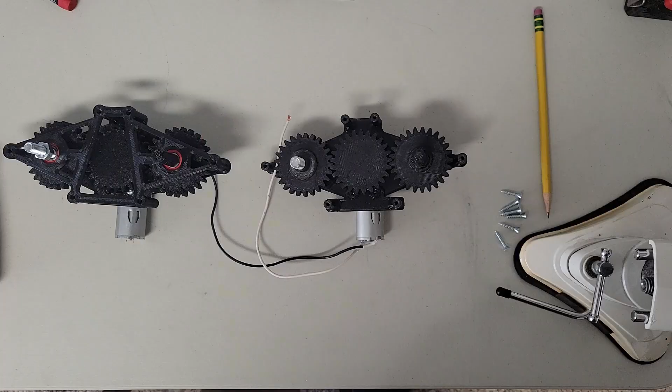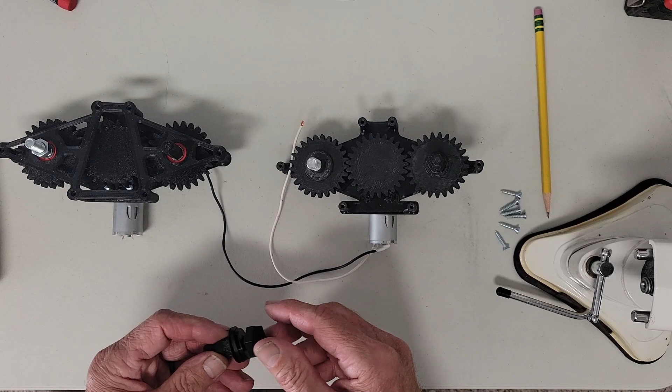A little history. On my 2.0 version, I had a complete plastic axle, plastic nut, plastic washers that held the drum on. So unless you were careful, and I have a video covering this, sometimes these parts melt if there was too much heat transfer into the drum.

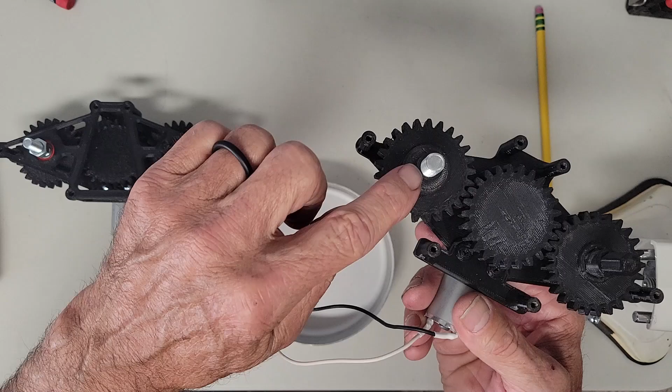Well, I tried to solve that problem with my 2.2 version, which takes an actual nut and washer, but the thing is, it was still necessary to have contact as a stop against this plastic. So even though we had a metal nut and a metal washer here, which helped soak up the heat, there were some instances where people still ended up melting this, and so I wanted to come up with a solution

for that. So this is the old gearbox, which is 2 bearings, one bearing on each side, and being 1 bearing, obviously 2 bearings give you more stability, so I was actually relying on part of the box up here for support, which is not optimal.

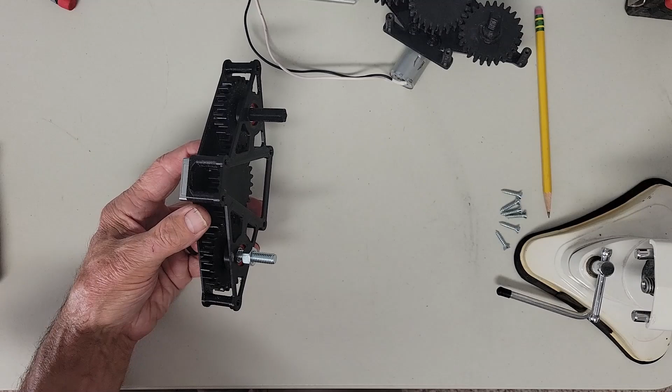Well, what I've done is I've come up with version 3.0. This one is a 4 bearing design, or 2 on each axle, much sturdier. I've completely eliminated the plastic contact with the drum, because now here we got a stopper nut that is actually able to adjust with the drum, and this isn't the correct drum for it, but anyway, the drum will go over with another nut and a washer, so there's no plastic in contact with this.

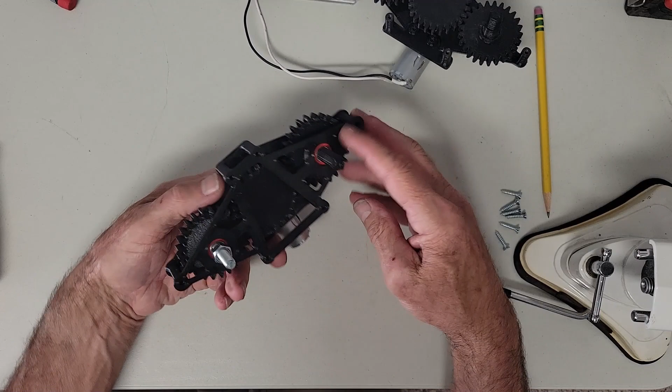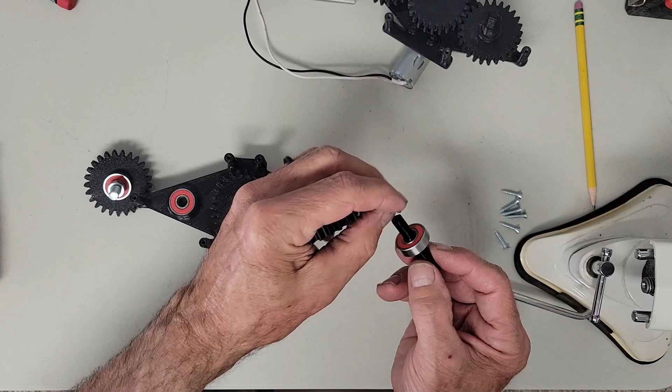I'll show you. And also for added stability, of course, I've got this bearing brace up front. So let me just cover how this is. So we've got our 2 bottom bearings, and on the cartridge drum side, this is an axle, but it obviously does not spin on it because we got the inner bearing race, and of course then we got the bearing on top, so it's completely sandwiched between 2 bearings with a bearing spacer there.

And this side, again, this goes in the bearing bushing, but on this side I've created a hex hole so that the 1.5 inch by 5/16 inch bolt sits in there and then gets sandwiched between the 2 bearings. So there's no plastic touching throughout the drum until you get to the head of the bolt, but there's a lot there to soak up heat, and a big surface of plastic I don't think will ever be a problem. It wasn't a big problem the other way, but this way it should definitely not be.

And then of course we've got our bearing brace that goes on top of all of that, and nice sturdy unit. Can't turn it because the motor's on there right now, but everything turns smooth, and I'm really happy with this setup. Now I'll show you how to install the gearbox. First we start with the motor.

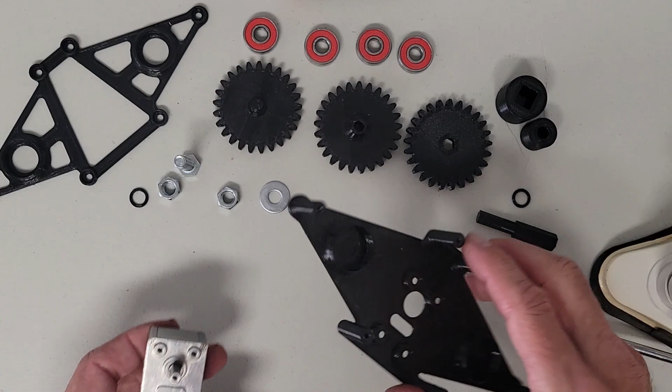The 2 close uprights are the top, the far ones are the bottom, and the motor points to the bottom. So you'll place the motor on there. You need 4 3mm by 6mm screws, and those items are in the list. Unfortunately, the motor does not come with them.

Okay, next thing we'll do is take the center gear. It is the one that has a flat spot in the hole, and you need to line it up with that flat spot on the shaft. So I usually just turn it on there and gently give it a turn until it slides down, and then just push it down until it stops.

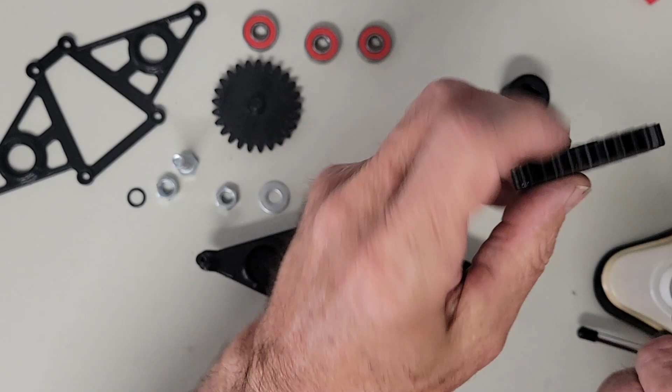Next, on the right side is the cartridge drum, axle, and gear. So we'll take the cartridge drum axle, slide a bearing over it, and then a bearing spacer, and then take the gear with the elevated side down, because that's the other side. The bearing spacer is already molded in, printed into it. Put those together, so now you should have a gap, the bearing spacer on each side.

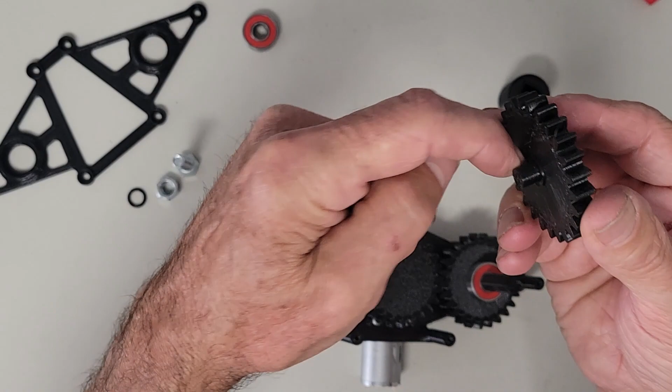Place a bearing into the hole and place it on the shaft. Now for the left side, for the drum gear, again, place a bearing in there. Here is the drum gear with the bearing spacer, again, already printed onto it. So the large hex hole will be up.

Next comes the drum axle, which is a 5/16 by 1.5 inch bolt. You will put a bearing spacer over the bolt, followed by the 4th bearing, and then just insert it into the hex of the gear.

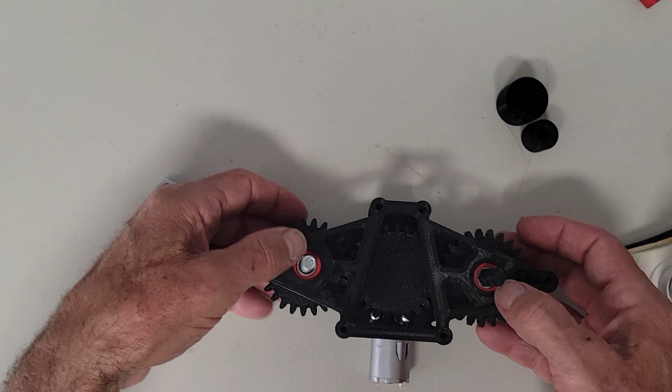Now we have the bearing brace. Just put it over the top, and with your fingers you just need to pinch on each of the posts and the bearing to make sure they're all seated. I go around a couple times. You should hear nothing go down anymore. And your gearbox is complete.

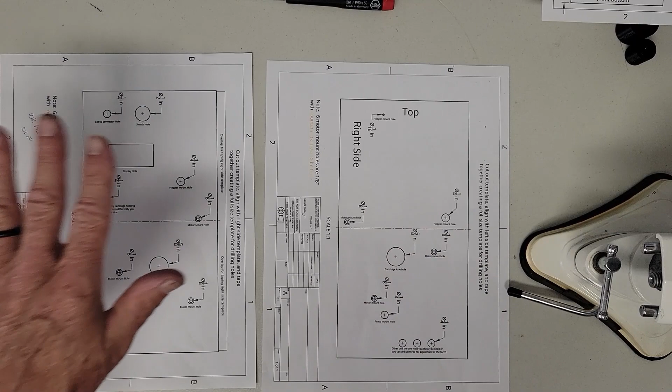Now, in your instructions you will have 2 template pieces. Like this, how they go. This is the left side, this is the right side. I wanted it to fit on an 8.5 by 11 piece of paper, so making it full size of both sides, it'd take a large piece of paper.

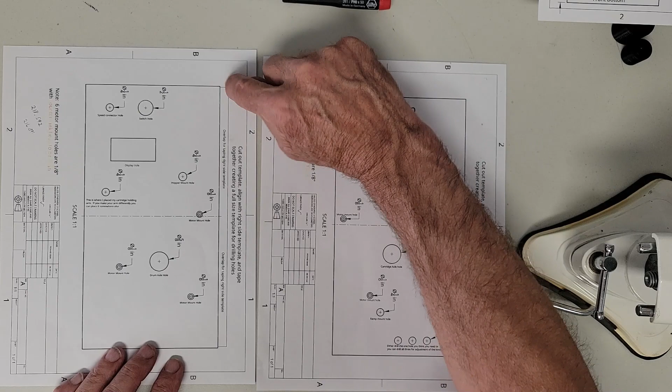So what you do, you follow the instructions on here and you cut out these 2 squares, which is the template, and the instructions on here explain that. Remember, on the left side here, you need to leave this extra box I have, because that is where you're going to overlap this side, and it just gives you some purchase to tape to. So on this one it says overlap for taping right side template. So you actually want to cut out here and follow the outside line.

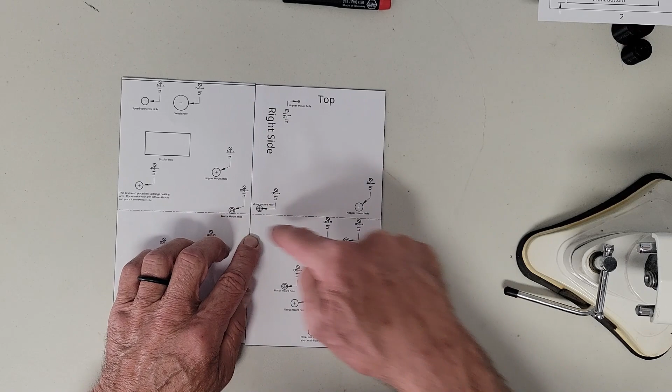So when you get those 2 cut, this is what you will have. Now what you'll do is you'll take the right side and place it over the left side and line up. What I generally do is I move it inward like this so that I've only got one visible black line. Then you should have one black line there and one there. Disregard this one on there, this one's just a demo piece. But this should be a straight line also. So this dotted center line should line up.

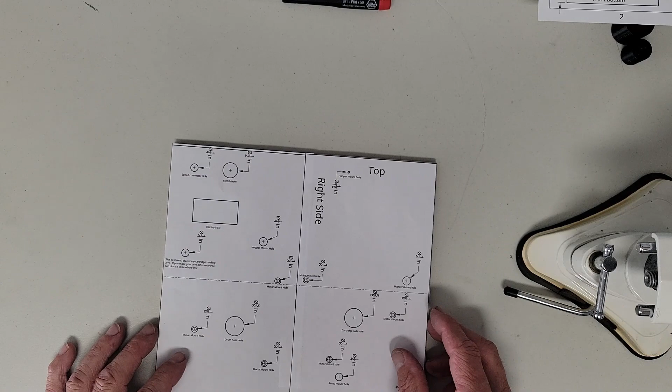And then when you've got that, you get a piece of tape. You're going to tape them together. And then you'll get your front face piece of wood and you will line them up on here. The sides should be the exact size piece of wood. Get you some tape. Tape it around on each side.

And then what you will do is you'll take something sharp. I have a center punch, but you can use a nail and place it carefully on the center of each of those little X's on all of these holes, and just give a light tap to put an indent for your bit to start.

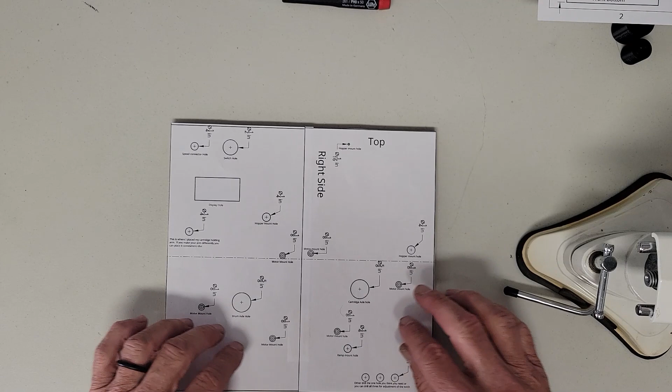And I've marked on here what size hole this has to be. This looks like a double hole, but it's an 1/8 inch hole, and the outside hole is showing the taper, because these motor mount holes need to have a taper so your tapered screw will fit flush, so nothing will touch it from the other side.

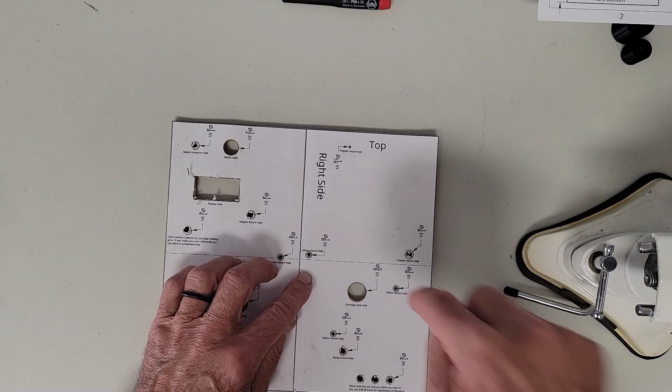And so here's an example. This is mine. As you see, you just take and you drill right through the paper and follow those instructions, and when you're done, you should have something looking like this, except for the mistake I made, which is a hole right there. I was prototyping, and this was the hole for this old hopper.

But as I found out later, when I went to put the electronics on there, the electronics hit that. So I had to redesign the hopper like this. And so now that gives me room on the back that's away from the electronics. So that has been fixed. But this is what you should come out with. Tapered holes, 5/8 inch holes here. And yeah, just follow the instructions and you shouldn't have any problem.

When I'm putting the box together, I generally glue the pieces and I put these tiny finishing nails. It's up to you how you want to make your box. In fact, your box does not have to be this size. I could take a piece of wood that's thicker or thinner or even larger size, as long as you place your template on there the way you want it to be.

Picture this being a bigger piece of wood. If I wanted it right there, as long as you put your holes there, everything will fit where you want it. So you're not limited to the box that I have. It's just my recommendation. I like a small footprint.

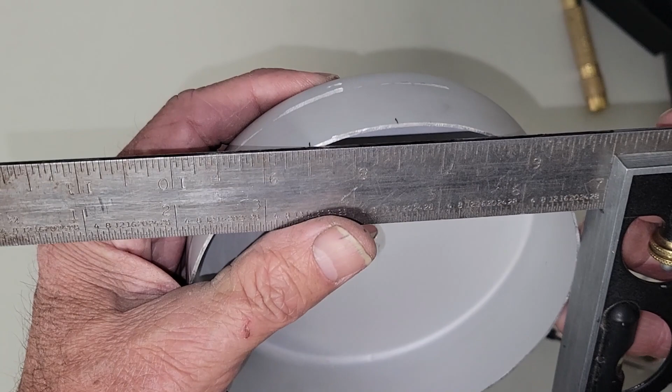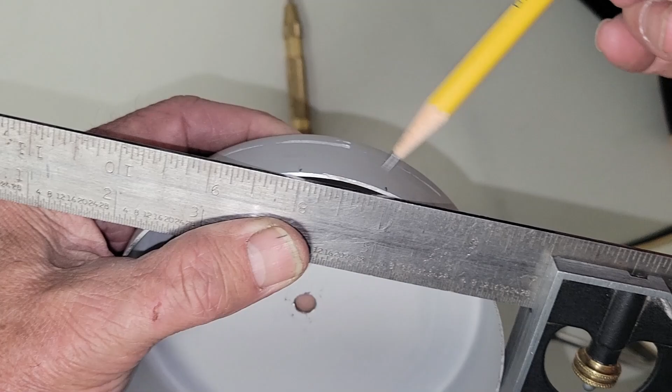Now the next thing we've got to do is cut our 1 inch slot for the cartridges to drop in. So what I do is, I've already marked mine, but essentially any ruler, just put it on there, and of course I just marked straight across. It doesn't have to be at the radius, but 1 inch, a 1 inch mark.

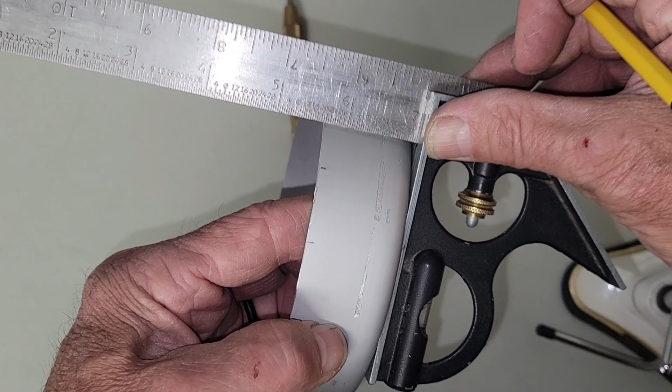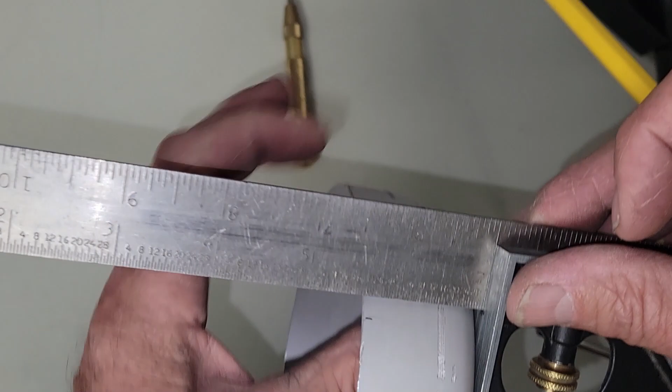And then what I do is I take my square and hold it against the base. I would suggest not to do this, because if your cut is not perfectly square, then your lines will probably be crooked. See if I can do this holding it. Just going to draw 2 square lines all the way down.

Okay, again, I'll go back out to my Dremel, and a hacksaw does work pretty good on this, but I'm going to cut all the way down to the base. And you see we've got this radiused lip. When this cutout is gone, that lip needs to be totally gone. So in other words, the outside edge of this will be exactly flat with this going out, because if it's not, then the base of a cartridge could catch on it and flip it crooked. So I'll go take care of that.

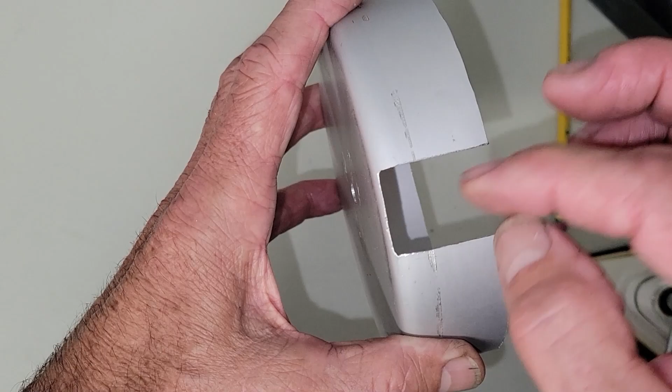Okay, the cake pan is done. There's my 1-inch notch. A couple tips. So I just did the 2 cuts like this, and you don't have to worry about cutting along here, because once you've got those 2 cuts, if you just take this piece in your fingers and work it back and forth about 5-6 times, it'll just break off, and then you just have to clean up this edge. As you see, I have this edge that's perfect with the bottom.

Another tip, I put a piece of duct tape, but just put some tape in here, because you're going to have to take your file and file this smooth, and it just prevents this from getting all scratched up, which I've done on an old one, but it's just cosmetic. But there we are. We're all done with the pan. Now I'm going to mount it. Now let's go ahead and assemble the annealer to the face.

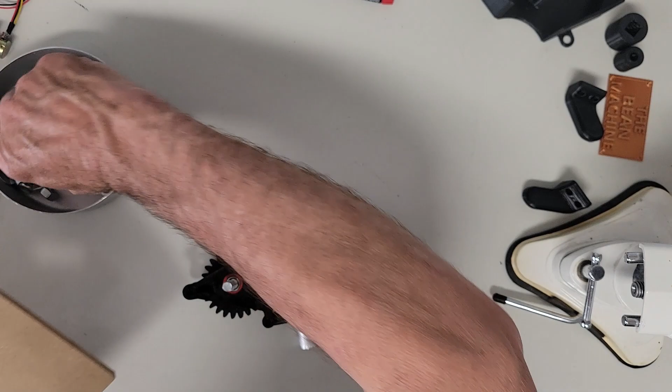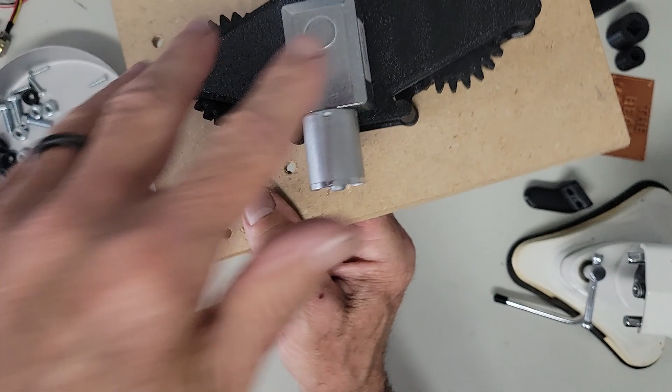So what I do is I just take the gearbox and lay it down, and I start the 2 outside screws, tapered screws. And I run them down until they just barely stick out. And that allows me to take the gearbox, and I can already set them on those holes and get it going. See, so it's already in place. Turn it over, set it down, tighten these 2 screws.

Now when you tighten these down, you just want to make them tight enough that you have no more gap back there. So I have a slight gap, I can still see. You don't need to really cinch them down and strip anything out. There just needs to be all the gap taken up.

Okay, next we'll take the hopper. The hopper is held on by 2 1/4-inch bolts and 1 machine screw, and you don't need washers. It's up to you if you want to put washers on the back, but I don't use them. So this screw here is similar to the tapered ones, and you can use a tapered one if you happen to get a pack of 12 or whatever, but I've just got a small head screw so it doesn't really interfere with the cartridges laying in here.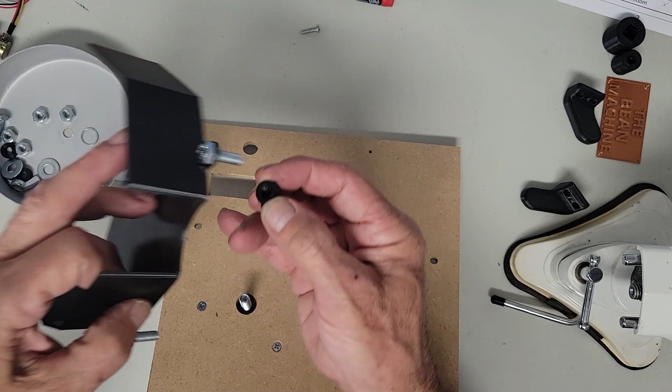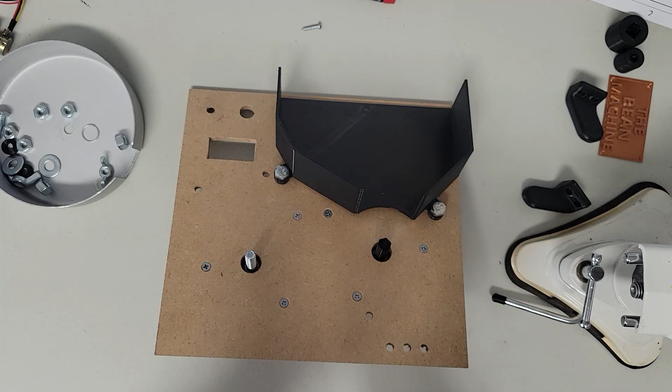Then, oops, let me back up. Missed an important thing. 2 hopper spacers, or actually 3 with the screw up there, but you've got to have the hopper spacers. So it should look like that with a gap behind, because it's necessary to bring these parts on this side a little further out than the drum so it doesn't accidentally hit the lip of the drum when the cartridges are going in.

And these can just be finger tight. I've never tightened these with a wrench. The only 2 I tighten with the wrench are the arm and the ramp. Okay, one more item. I put this spacer up here, then I just squeeze to kind of keep it from falling down in, line up the hole and put the screw in.

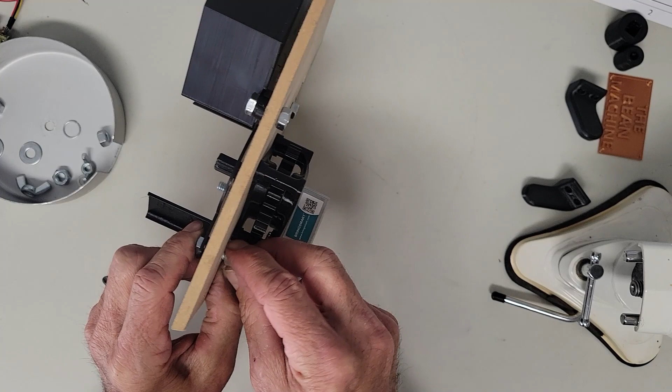Okay, next is the ramp. The ramp also has a spacer in the back with a 1/4 inch by 3/4 inch bolt. And that goes on the back, and when everything gets together, we'll just adjust this where it needs to be. But it is adjustable both in how far away from the drum and also the angle of the ramp that you might want it to be. But right now we'll just set it here. Okay, and once you've got that motor on the back, it will just stand like this.

So next thing we'll do is take the drum. Take one of the 5/16 inch bolts, screw it on down. Now, this will fit in the hole. This is what makes the adjustability. On my old version 2, my printed plastic piece kept the drum a certain distance away.

I suggest 1/16 to 1/8 of an inch away from the face to start off with, but this is adjustable. You'll be able to adjust the drum in and out because this will now go on here with a flat washer, which I provide, and another nut.

And then, so now there's the adjustable gap in the back. Okay, and as far as, if I can find my piece, so this is what you also get from me. This is one of the key features of this, because it's adjustable for your cartridge size, however you would like it. This one here is primarily for 223 size cartridges. This is for 308 and 30-06 size cartridges. And this is for larger, I forget, like 300 Winchester Magnum and so forth.

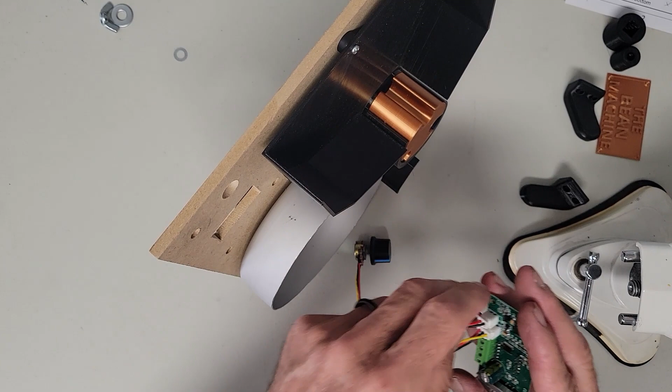Okay, now the electronics. You will get this, I think I already threw it away, but this comes in a black housing with a red cover. All you do is get a screwdriver and pop this out of that cover. So this is all you want. The cover is garbage. It's way too big for this. It would take up this whole spot here. But go ahead and unplug the switch and the rheostat, and they can only go in one spot, so you don't have to keep track.

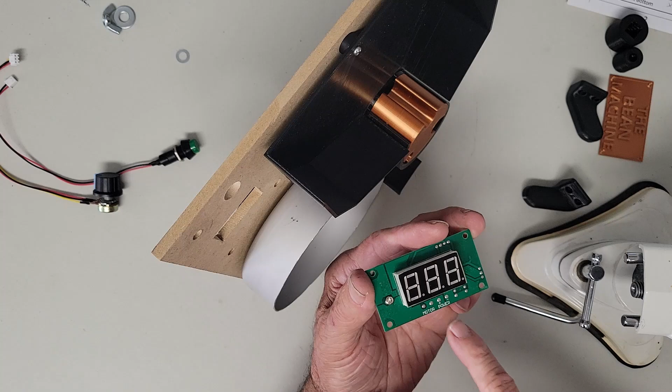On the front here, it says motor and power right here. Power positive. Once you put this on, you won't be able to read it. So I just took that positive sign and I wrote it there so I know which is the positive power for this. You then just, if you cut your hole a little small, you might need to file it, but when it goes in, it should fit perfect like that.

Another side note, on here, I've already clipped them off, but there are leads where they soldered them on. I just took my clippers and I clipped all those off, because if you don't, it'll hit and it'll sit crooked. So I think there were 6 of them there and 4 of them there, but once you've got that all smooth, this will fit in there real nice.

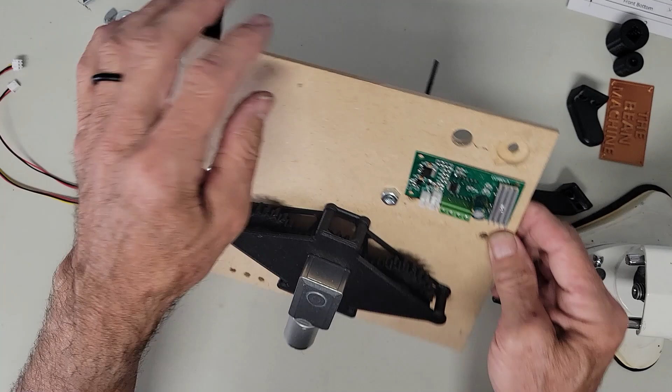Now what you can do is, I'll leave it up to you. You can either take 2 small screws and put them in opposing corners, or you can just take hot glue and put some hot glue on there and keep it in. Next, you'll take your on-off switch and take off the nut. Now, it does come with this lock washer. Go ahead and leave it off, because as you'll see when I get this on there, there's just enough threads for the nut. So feed it in to the hole on the right.

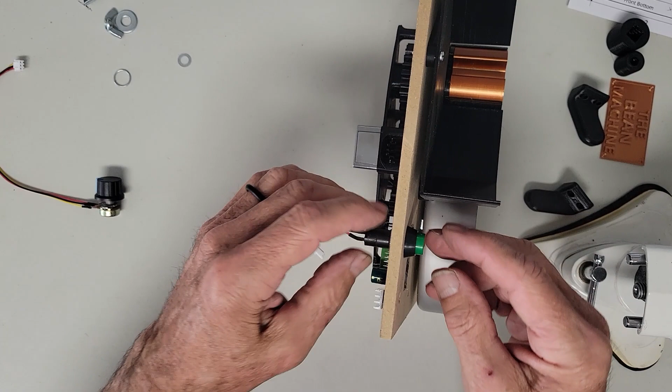Put your nut over the wire. And again, you can just do this with your fingers. You can just hand tighten it. So that switch is in there. Now you take the rheostat, you pull off the knob. Again, it comes with a washer. I don't use a washer because you're going to have very limited threads. Take the nut off. Now I'll show you what I had to do here.

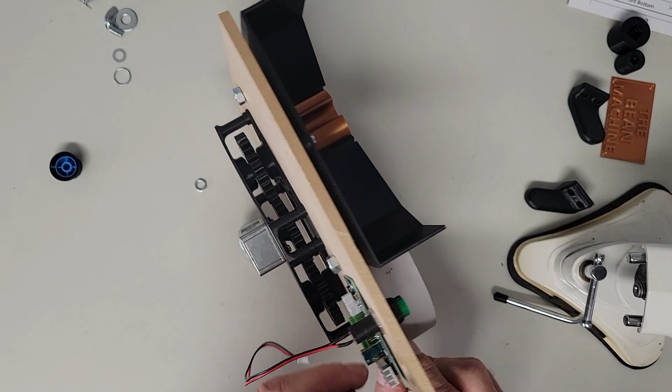If you put this through here normal, like if you stop right there, you'll have to do a couple things. One, you won't have enough threads to put the nut on. But if you elected just to slide that on there, it would still function, but it's barely on. So you'd either have to trim off the edge of this knob to slide on further, or what I did

is I took a 3/4 Forstner bit, and this wood is very easy to work with, but I countersunk it halfway, and then I needed to make room for the 3 wires coming out, so I just took my knife and I just whittled it right there so that it fits right in there like that. And then now, as you see, I have enough threads for the nut.

And the knob. Okay, of course I didn't glue this in, so it fell out, but once you get it mounted, obviously it'll stay there. Okay, then just take the 2 cables and connect them back on there.

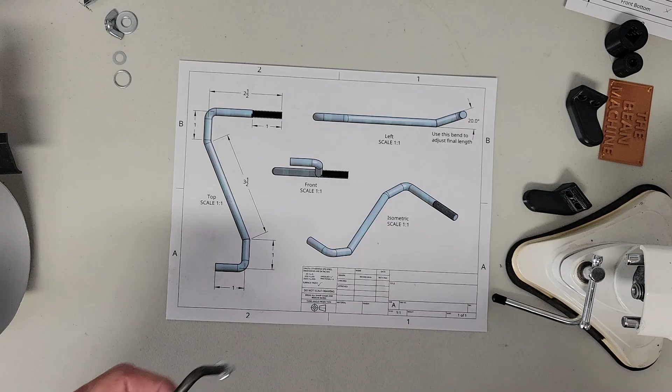Next, we'll take the cartridge holding arm. Now, this is one that I bent myself. So, in the instructions, you will have this template. This is a 1-for-1. So, if you wanted, I actually use this template. I took it in the shop, and I lay this 1/4 inch straight rod.

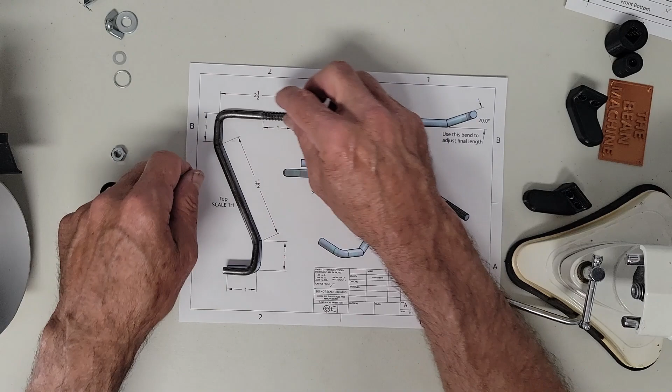And so the rod will be sticking out here. I literally lay it on here, and I mark right here where the bend's going to be. I put it in my vise and I bend it, and I lay it on there and do another mark. But you see how if you do it that way, this is actual size of the arm. So I just use this for the bending.

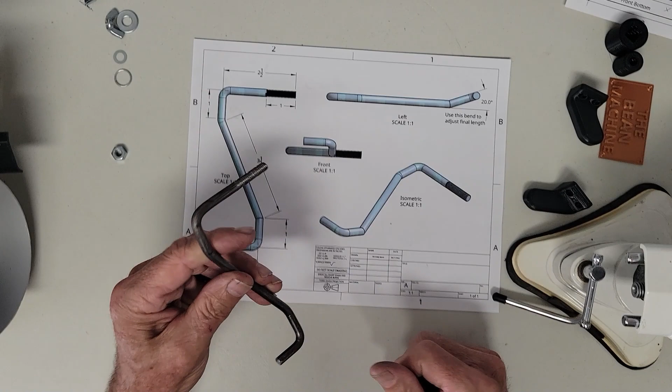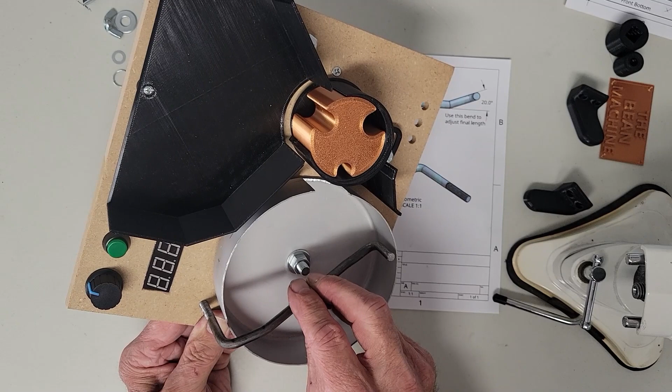This bend right down here, it's a 20-degree bend, but obviously everyone's not going to bend it perfectly, but this part needs to be at about 5 to 5:30 right here. And if your bend is too long, and for example you're hitting like that, the purpose of this bend here is you bend it however you need to, so that it is only like a 1/16 to an 1/8 of an inch away from the drum. Should be about that distance away.

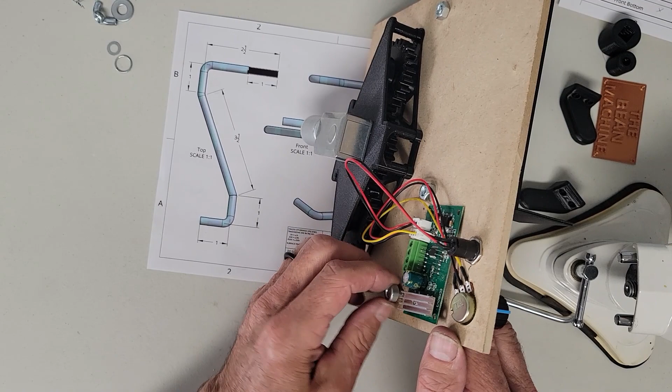Just make that bend so that this will be where you need it. So I'm going to install that next. Put a 1/4 inch nut on it. About right there. Slide it into the hole. And take another 1/4 inch nut for the opposite side. And this is what you'll use to adjust it. And it doesn't need adjusted all the time. In fact, once you got it set, you shouldn't have to adjust it at all.

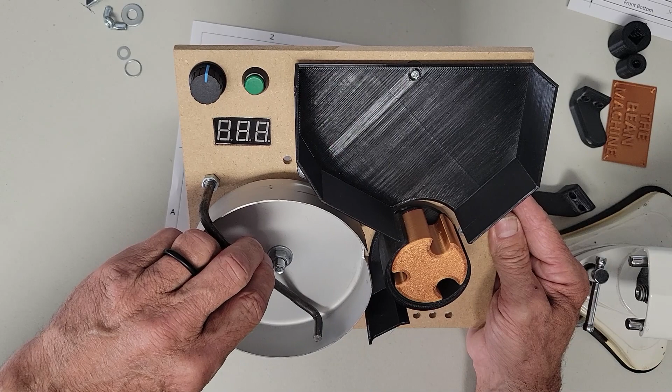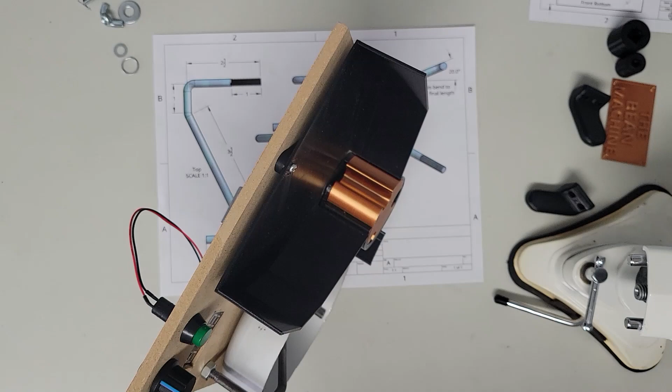So you're looking for about 5 to 5:30. Let me get my wrench. So, for example, I'm going to tighten that down right there. So you're looking at about 5:30. It should be resting in there, and it should be rolling. If this was too high where the cartridge was kind of going under it, you might see the cartridge not even spin. And that might mean you need to move it down a little bit more or adjust that bend so that you're in this area.

If you're too far down, it has to rest against that bar to spin, because if it's down here, your cartridge probably will not spin. Also, look at this distance here. It should not protrude out the front, and you should have like a 1/16 to an 1/8 of an inch behind there. And to adjust that distance, that's where you will use these two nuts to adjust the distance that you need.

So essentially, other than power and our torch holder, this thing is finished and ready to go. This can almost anneal. So I showed you my box earlier. So I complete my box to this point. And now to test things before it's all completed together, and by all means you could put it together and do the testing, but this is just how I do it. I set it on there like that. I stand it up, and now we just need power before we finish this box up.

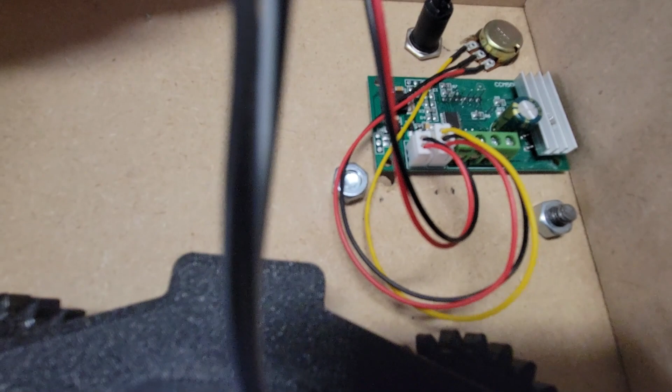So back here, make sure you know which is positive, and in this case here, positive is on the left, because of the center stem. If you want to do a continuity check, and I wrote a plus and minus on mine, so the positive is on the left, but I do a continuity check with my multimeter to make sure. And then remember, we put a positive and minus up there where I wrote it. So I'm going to do this off camera. I'm going to connect my two wires here, and I'll be right back.

Okay, what I did is I went ahead and put the positive wire here, negative wire there from the power supply, and then you connect two wires from the motor. And what I did not show you, but down here, I just stuck them on there right now, but I will solder those. One way or another you've got to put connectors on the end or solder them on there.

Now, your motor, both drums must turn counterclockwise. So if when you turn this thing on and you find that they are turning clockwise, you just need to come up here, undo these two wires, and just reverse them. So positive and negative is not important there. It's just going to be the direction that the motor runs. So let me get the power connected, and I'll be right back.

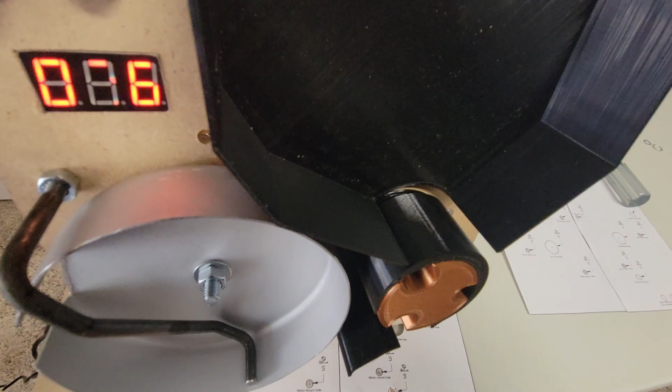Okay, we got the power plugged in, and when you plug in that motor wire, you've got a 50-50 chance. And mine was backwards. Mine was turning clockwise. So I undid them, and now it turns counterclockwise. So if I turn it on, everything's turning as it should. When you look here, the back of your feed ramp should be behind the hopper so that the cartridge falls straight down in. And let me stop it over here.

And your ramp, let me slide this down here. I shouldn't do that because I just loosened the nut. But as you see, when there's a cartridge on this ramp right here, the ramp should be a little bit ahead of the drum so that it does not catch the lip.

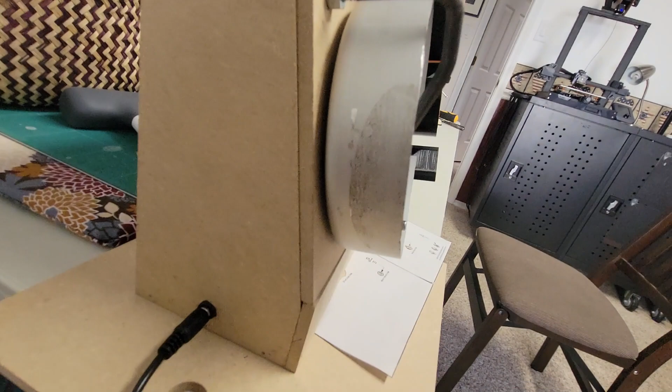And like I was saying before, another part of my video is you can loosen this nut, and the nut on the back side, you can draw it out. This here is kind of a large gap, so I might draw that out another 1/16 inch or so. But that is adjustable now since we have the two nuts on there.

Another thing I want to comment on, I don't tighten this nut super tight, because if something does hang up, like a cartridge gets hung up somewhere, something's got to give, and it's nice that the drum gives and slips. So it needs to be tight enough that it doesn't slip, but don't bear down on it.

Okay, let's go ahead and do a little test here. Let me select for 223, and I've got some right here. Come here. We'll see how that does. Oh, hold on, I haven't adjusted the ramp. Okay, I got the ramp adjusted, so you just want it real close to the drum, but you don't want it to rub. Let's turn this on and try it again.

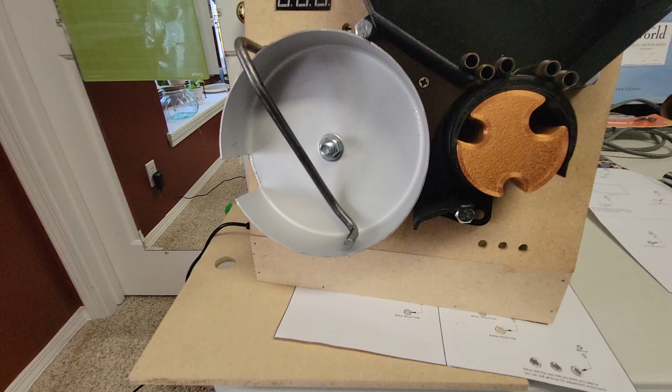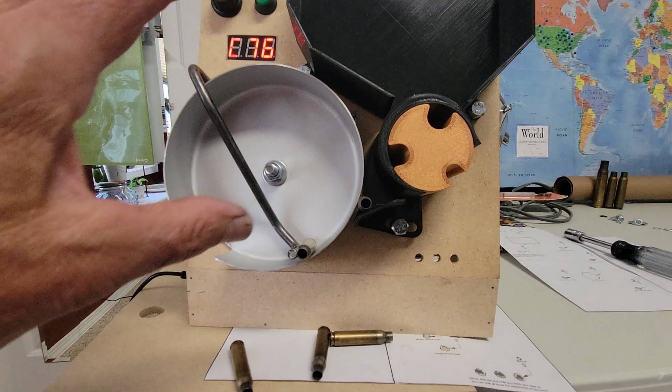One thing also on this version, I have a wiper there that just disrupts the cartridges so that they don't create a bridge. And on this version, I made it bigger, which I couldn't do on the old one because I ran out of room. The two drums are now a 1/4 inch more apart, so that allows more room for growth. Where if you have a little wobble in your drum, now there's room to play right there. So that's a big benefit.

Okay, now I'm going to throw some 30-06 cartridges on there, just to kind of show you how versatile this is. This will do 45/70s, and this will do most calibers without adjustment. You see, all I did is adjust the cartridge holder there, but it holds 30-06 just fine, even though they're sticking out there.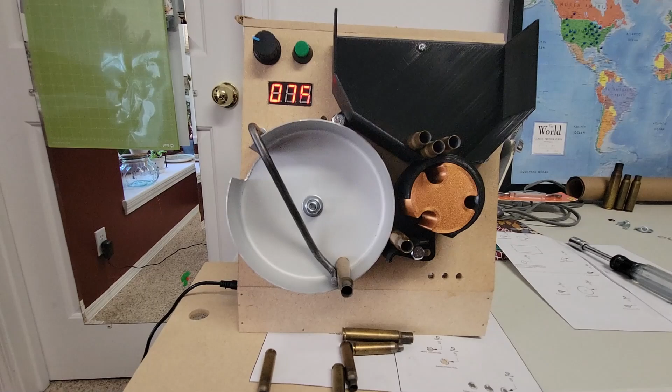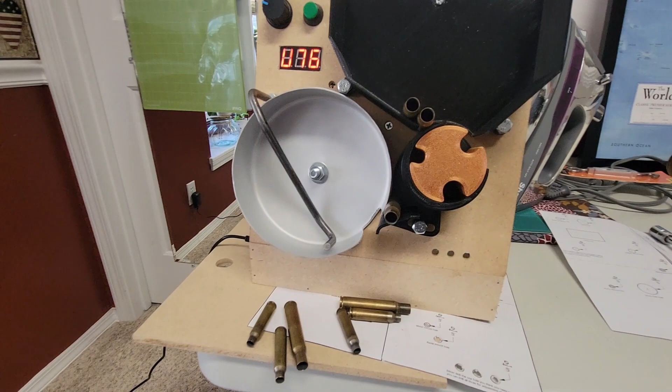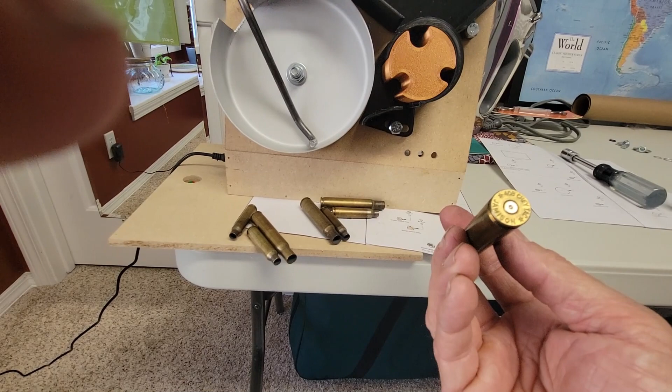In fact, I want to show you how versatile this machine is. I know there's a competitor one that touts how adjustable it is for the drum. Honestly, I don't think the adjustable drum for depth is all that important. Let me take these off here. So I have a 408 Cheytac. Here's a 30-06. There's a Cheytac. It doesn't fit in here because it's too big, and I don't even have the gun.

But you can still feed them one at a time, just like a competitor's machine. And it still stays in there. I can anneal that. In fact, I can even get ready for the next one, just like his machine does. And works great.

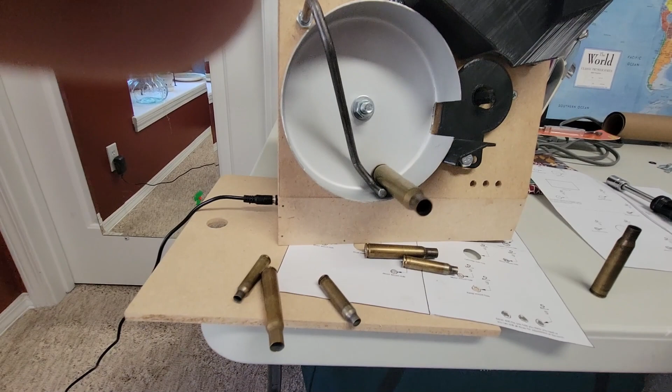In fact, if you had some big oddball cartridge that didn't fit in my slots, you can actually take the drum off and go ahead and run it, and then you're just down to a single feed, but it's still capable of doing it. And I know he touts his to do 50 cal brass, which I don't know anyone that even has one, even though I do.

But the drum would need to be a little bit bigger for this one. I mean, it'll hold there, but it needs to be a little bigger so that it doesn't fall out. But you see, it doesn't take much of a drum to hold a cartridge there.

So, okay, we have one more part to put together for this build. So this is the turnbuckle that holds the torch. It becomes a torch holder. I like this one because it's the only one that I've found that's flat on both sides, so the torch easily goes on there, I don't have my torch here, versus the rounded ones that are kind of concave. But what you want to do in here is, we're going to take apart this turnbuckle.

This, of course, becomes the torch holder. So it'll be in here like this, holding the torch down. And then that's where this spacer, because we run out of threads, that's what this spacer here is for. And then you would put the wing nut on there. And then that's what you'll use to adjust the torch from side to side.

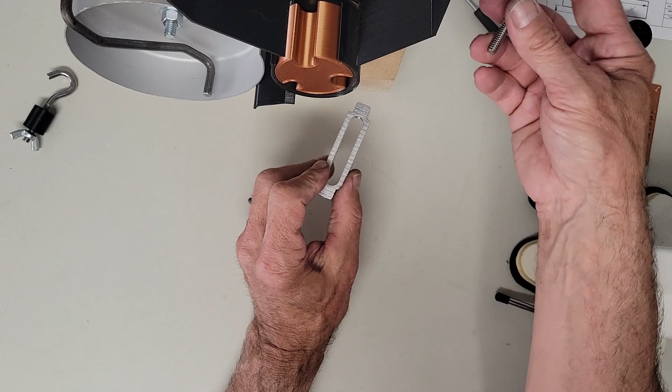Okay, now the eyelet piece, remember, the opposite end is a left-hand thread. So you have two options. You can either buy another bolt to mount this on here, and I use this because it's available and it's easy to reach in there and adjust if I need to. But the thing you got to remember is when you loosen and tighten it, remember it's a left-hand thread. So to screw this on, I'm going to go this way.

If that really confuses you and you want a normal bolt, just turn it over and use this side, because we're not going to use that side out here anyway. But I'm going to elect to use that. And so what I like to do is I will put this here as your torch spacer to keep it away from the wall. So it's a square hole to match that right there. I then put a washer over the top because these tapers here will dig into your wood. So you need a washer on there so it's got something to work against.

Then I have 3 holes here based on your torch. In fact, depending on your torch, you might even have to drill an additional one further or closer. But I put those 3 on my template. I'm going to go for the middle one and stick this on here and turn it opposite, of course. And I'll show you here in a second.

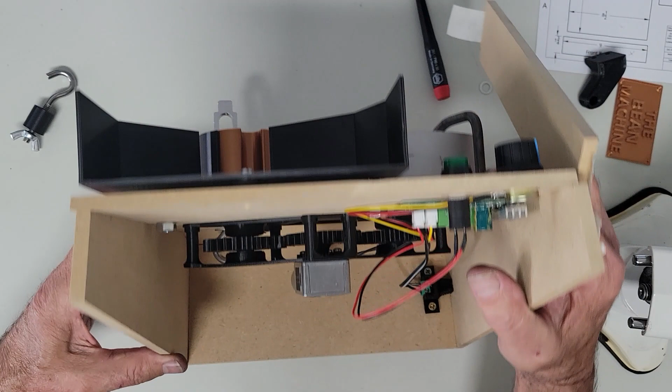Okay, so, and I'm losing my pieces. That's what it looks like on the inside, and as you see, I can just reach in here and grab that end, and it's good to tighten that with. And I've lost my top. So, now there's your torch holder. I'm going to use this as my torch. So you'll then stick that over your torch and tighten it down.

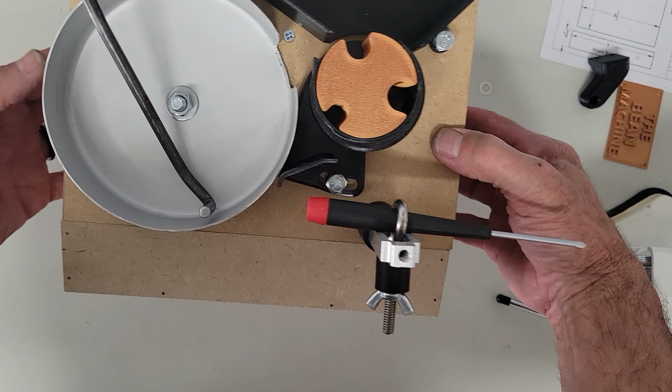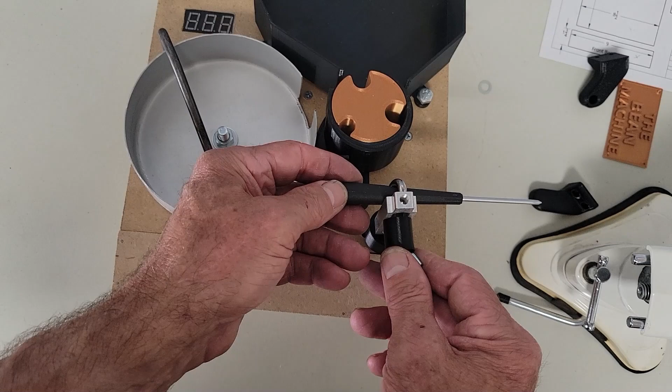Now from this point, you can obviously adjust your torch like this, or you can adjust it like this. I always like my flame pointing just a little bit away from the drum to keep it from overheating. And of course this screwdriver has a taper on it. And you can also adjust in and out for different length cartridges. So let me take a look. I think we are done. Okay, 2 more pieces.

These pieces are for the handle. I've got a hole on each side that perfectly matches a 30 caliber case. Maybe I don't. I need to adjust that. Anyway, they will go up here. You can either use a wooden dowel or your metal rod that you had, but you want them close to the front, and the reason why they're coming forward is so that they will balance evenly.

In fact, all we have left on this machine now is obviously I need to fasten and glue all the wood pieces to include this face. Now that I know everything works, get it on there. And if you want, of course, you need to paint it. In my case, I'll take everything apart and I'll paint it the color I want. But for the sake of time, I just cut these pieces out and I wanted to get it together for you. But you can leave it wood if you want. It doesn't really matter. Let me grab my other one and I will show you what I mean by the handle.

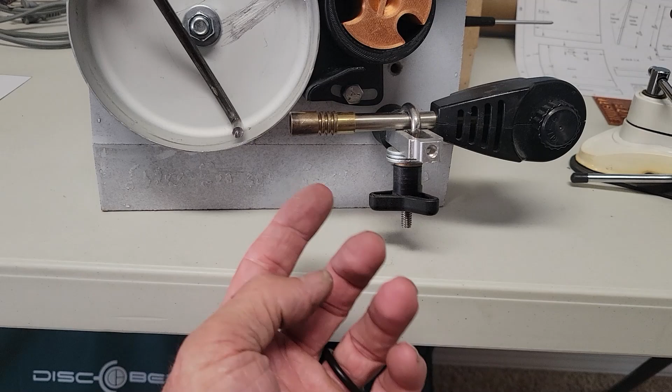So this is my old one, my 2.2 version. See how I took 2 30-06 cartridges and I just put a sheet metal screw in there and screwed them together after I drilled the primer pocket a little bit bigger, so that they fit the 30 caliber holes. And in fact, there's my torch still on this one. This is a knob I had in my stuff, so that's what I used instead of a wing nut. But that should do it. I can't think of anything else.

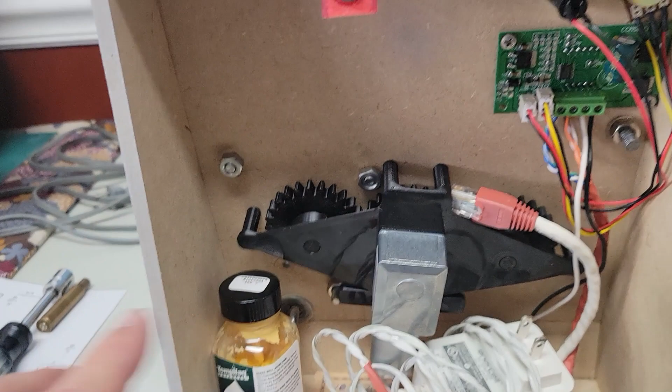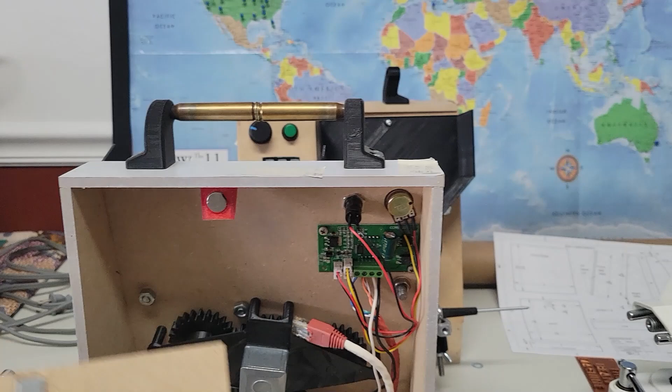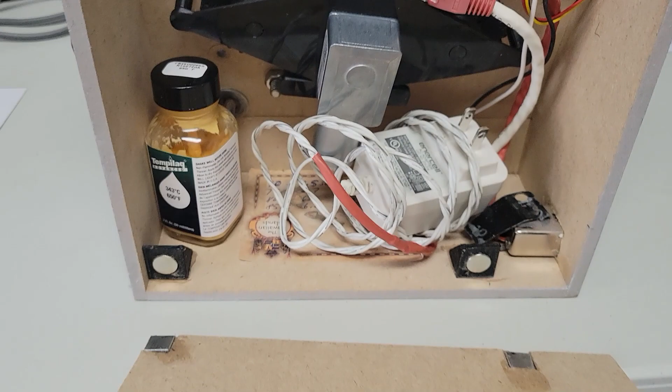Oh yeah, two more things I need to mention real quick. If I turned it around, and I don't have these printed out, so I can't show you, but these are the holders for the back door. On this one, I only have 3, but 4 comes in the kit because I find when I push on this corner here, I accidentally open the door. But what I did on the opposite side, I just took pieces of metal and kind of made an indent there and glued them on. And of course, those oppose the magnets. And then it stays on.

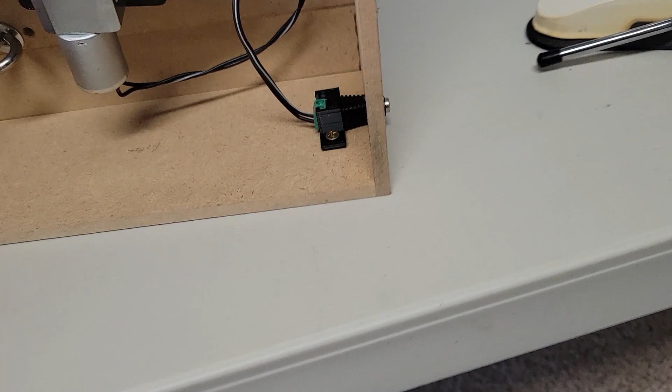And the other thing that I forgot to mention is the power supply. Now, this piece here comes with that power supply I recommend. And this holder comes in the kit that I print out. And so it's made so you put a hole over here and slide that in. And then this, with a couple screws, holds it in there real nice and tight.